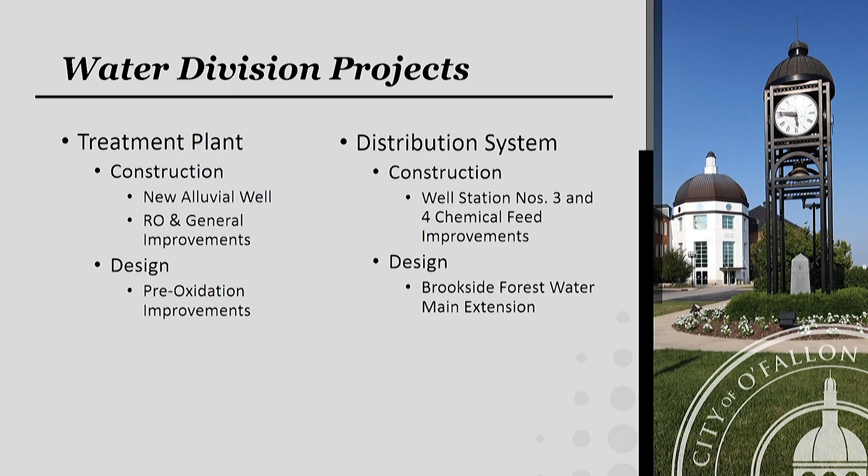So on the distribution side, we just bid out a well station number 3 and 4 chemical feed improvement project that's getting ready to start construction. It goes to council next week for approval. And then in design, we've got a Brookside Forest water main extension. So we'll jump through some of these projects, water side first, and we'll touch on the sewer ones after those.

So here's our new alluvial well project going in right now. This one's, I'll say, about 80 to 90% done. They got the last few months here. They got the electric hooked up to the new well house. They got most of the raw water main in, tying into the existing raw water main that feeds the plant.

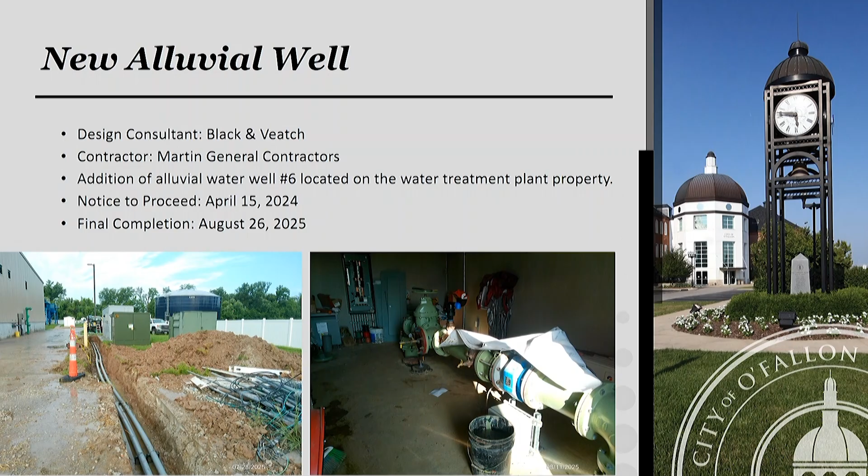And just got some testing to do on that before we can get it up and running and backfilled. Then we did receive some damaged electrical equipment that was shipped loose in a crate that we had to send back. So there's a little bit of a delay on getting replacement parts for some of the electrical drive for the new pump motor. But other than that, it's pretty well just finishing up now. So should start to come together pretty quick here, and then we'll do startup. We're shooting for probably mid-September, I think, right now for it as well.

So kind of unfortunate, it's probably right when the demand starts to drop off for the water into town, but it can't time it sometimes that well. So that's that project. Like I said, it's pretty well close to wrapping up.

This one is just the opposite, and it's just getting started. We issued notice to proceed back in June on this one. The contractor - this will be, other than the public works facility which is around 30 million, I want to say this one's about a $10 million project, so it's probably one of the next largest ones for water sewer. And this one right now is just going through a lot of submittals with the contractor, getting submittals approved, getting the ball rolling on paperwork.

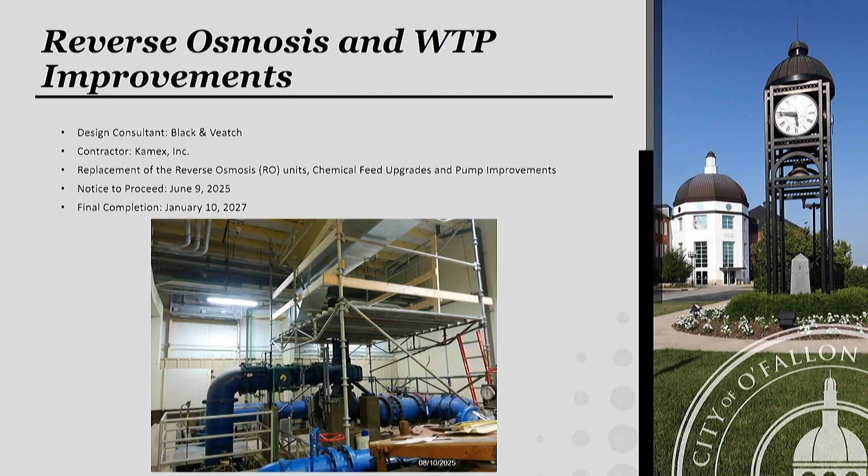One of the other upgrades they'll be starting on next week is replacing the fencing around the site. We've got some old white vinyl fencing that pops out of place when the wind blows a little. It's not a very secure fence for a water plant, so we're installing chain link with barbed wire at the top - a more secure fence. There's also a new electric gate, because the current gate quit on us last week, so we're not spending money to fix it since it's getting replaced with this project. We're using the gate manually right now, but the fencing took a beating during a hailstorm a year or so ago, so it's been patched back together a few times and needs replacing. That's one of the nice things we'll get with this plant project - a nice secure site, since we have operators there overnight by themselves, and we don't want anything to happen.

So the pre-oxidation project is just getting started on design. We worked through scope and fee in a scoping meeting with the consultant Burns & McDonnell. They did a study previously to look at the pre-oxidation system and filter analysis a couple years ago, so this is the next step in that process to get them to go in and do the detailed design of those improvements. We're just getting ready to get them under contract to start that design work, probably in the next week or two.

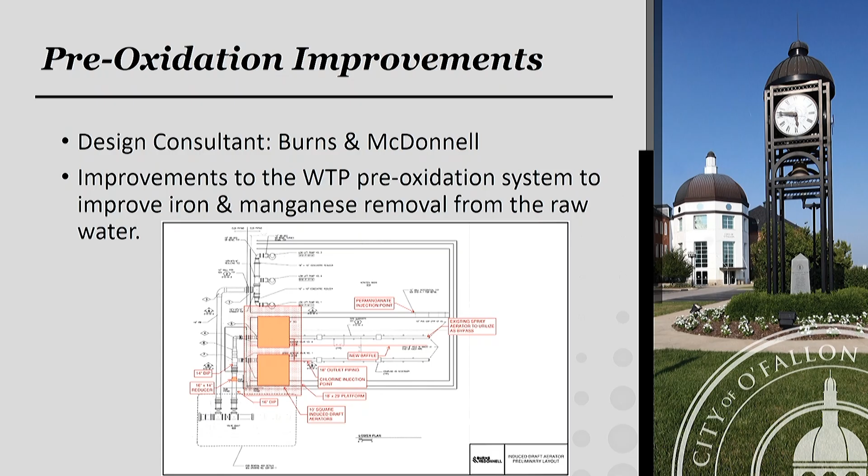This one just bid out and goes to council next week for approval - the well 3 and 4 chemical feed improvements. Well 3 is the water tower on Main Street by McDonald's. Well 4 is the one over by Child's Tire, just off the outer road. Those chemical feed upgrades will convert the disinfection to a chloramine system, so it matches our water plant water and matches any water we buy from District 2 or Missouri American Water. That helps alleviate some taste and odor complaints we get from mixing with our current free chlorine system, so it'll provide a more consistent feed. The other big benefit is it's a safety improvement - we have chlorine gas cylinders at those two sites right now, one right next to McDonald's and one right next to a daycare and a house, both residential. We did have a leak on one of the cylinders from the vendor that we had to call the fire department out for, about a year ago, to contain that leak and get the cylinder off site. It's just not safe having that potential leak hazard out there, so this will get rid of those chlorine gas cylinders as a perk too.

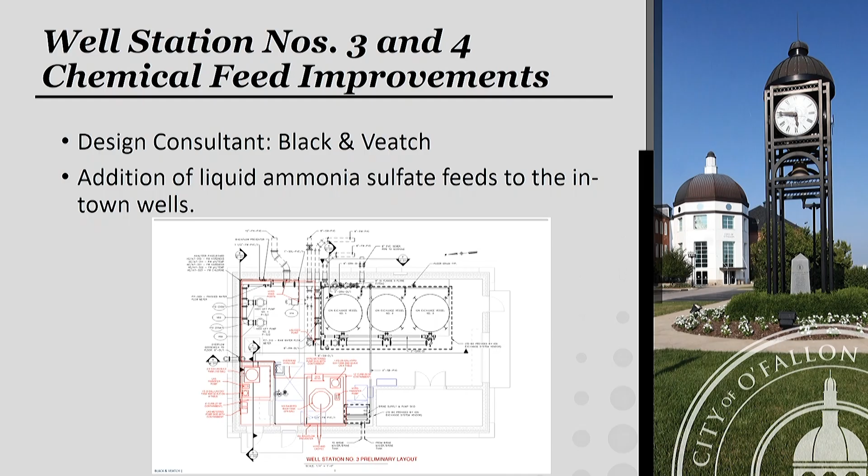On the distribution side, in design, is the Brookside Forest Water Main. We had a meeting last week to look at 3 different alternative alignments - this is just in the early stages of design. This is one of the alternatives they looked at. It will connect Progress West, by the Environmental Services trash receiving station, across Peruque Creek over to Brookside Forest Subdivision, to provide a redundant feed for that area, because right now there's a main just to the north that's the only feed for that area. If we had a fault on that main, it would put a pretty good hurt on that area of town not having a backup supply.

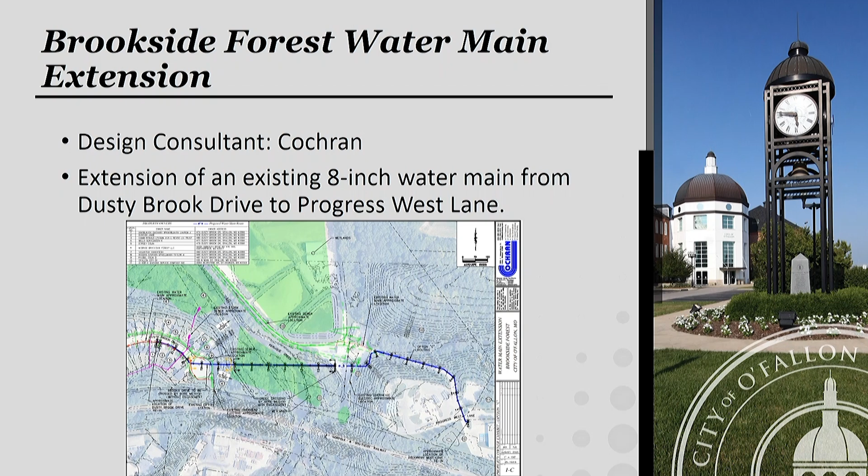Any questions on the water side? Do we want to just go through them all, or I can stop for questions there if you want to at this time? All right, just go through them all. Go through them all and catch up. I got a question slide at the end anyway.

All right, sewer side, we've got a little more activity over there. Two projects in construction right now at the treatment plant.

4 in design. Got 2 in, well, 1 and one's just getting ready to bid out here, so I put it in the construction. Bids should be coming in any day now. So I put it in the construction side since the design is pretty well done, and then the 3 in design on the collection system side.

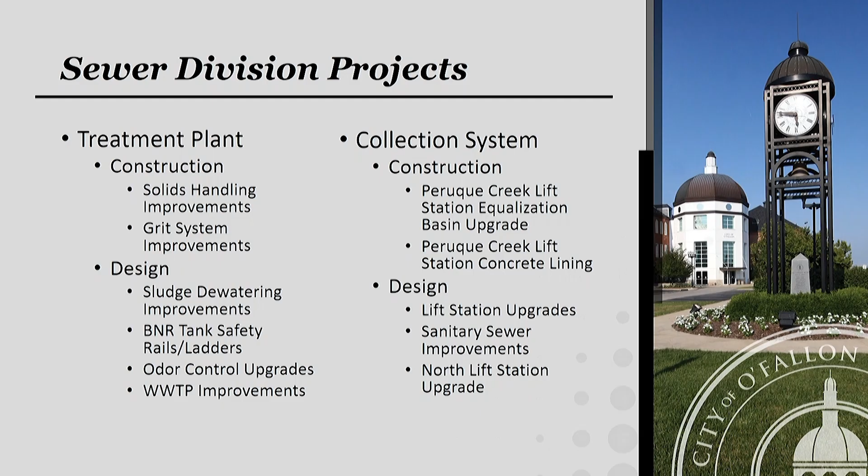First one is the biggest one, I guess, right now going on the sewer side. This is about a $7-8 million project. This is our solids handling improvement project. Mainly, the biggest piece of this is our new headworks building, or they call it the influent screening building. So it's a new fine screen system for the wastewater plant.

So right now we currently have just a 1/4-inch bar screen at the front of the plant. So when our force mains come in, the first treatment the flow sees is that bar screen. This will reroute that flow to this new building. It'll have the same thing, a 1/4-inch bar screen, followed by a perforated plate 3mm fine screen.

So it's just a future protection device basically for all future downstream processes, because we've built this new BNR tank system that's got a bunch of aeration diffusers in there. We've got future plans for the biosolids process to look at centrifuges for that process. So it's kind of one step early in the process to plan for the rest of the treatment as well. But it's moving right along.

It should be done in the next few months here. They got the building pretty well up. There are multiple pieces of this project. They got the main piece of that new screen building done.

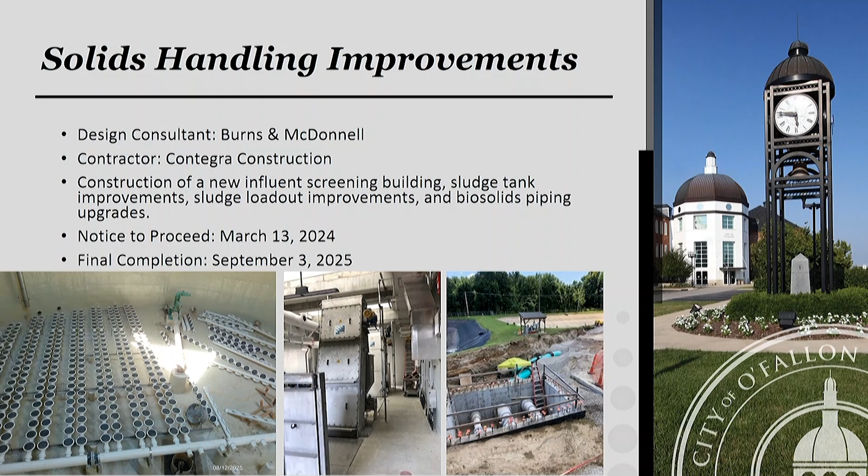Still a lot of activity going on, but it's starting to hit that downhill run, to start finishing things up. So electric's all on, hooked up to the new building. Just starting to prep for the finishing touches. Startup is scheduled for the aeration, I think, early September for the blend tank, and then the screen vendor is scheduling startup around October, early October I want to say. So they are a little behind schedule, but we're working with them on that to get it wrapped up. As long as they keep moving, making good progress.

Grit system improvements, don't have really any good pictures of this yet. This one just got started early June or mid-June, but it's working through the submittal phase right now. Plus there's pretty good lead time on the equipment, so I think that's the main piece, is getting that equipment on order, and then there's not really a whole lot to do until the equipment's there, because we're still using that grit system right now, the current one.

But this will add a new, what they call stack tray style system. You can kind of see on both of these pictures, it's kind of like a stack tray profile there that creates the velocity to settle that grit out, but not settle too much material out to where you're starving your biologics for food later on. And then on the picture on the right, the little thing on the left, that's the grit classifier dewater system.

So we get a new one of those in our grit building. That'll dewater and wash and press the grit and put it in a dumpster for us for hauling off. So it'll be a good project. We can see the current system, just watching the water flow through the process.

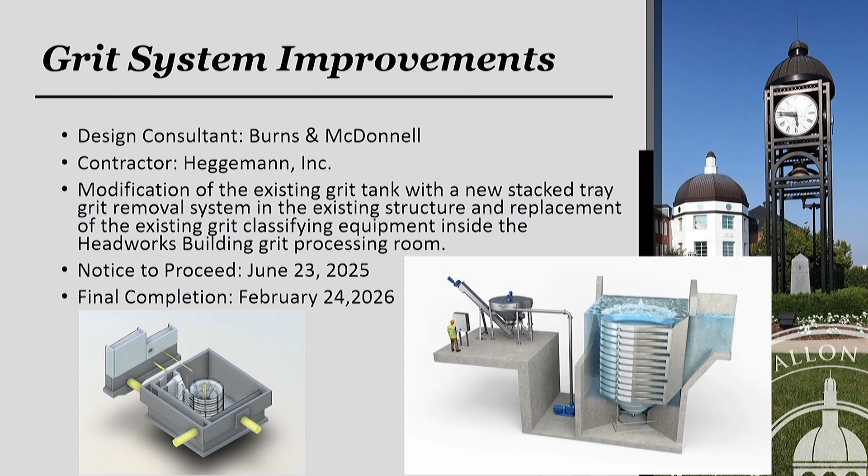You can see there's a lot of carryover grit right now, and it's just not a very efficient process. This will help downstream, like the headworks. It's kind of step 2 in the whole treatment process, and it's going to help all those future improvements coming down the road. Plus, the new BNR system that we built, just maintain that equipment for the life of the plant.

Sludge dewatering improvements. This project's in design right now, just starting final design. We're putting new centrifuges in for dewatering. Before me, I think it was 2018, there was a screw press project that didn't meet performance, so this is kind of the wrap up of that project. This will replace some equipment in there with new centrifuges.

MSD's got a few we looked at. City of Fulton's got one we went and looked at. Jeff City just put new ones in that we looked at. Very efficient process, very contained process. It'll be a good project to clean up that project that wasn't finished before - it didn't meet the performance. But that's again kind of why the first step was the headworks and the grit, to prepare for these centrifuges, so that you're not sending material that's going to damage that equipment long-term and cause issues down the road.

This is called - the picture looks a little grainy - a LiDAR scan of the building, where the consultant came in and did what they call a LiDAR scan. Kind of new technology for surveying, whether it's sewer lines or buildings or whatever. Then they just draw over top of that. This is just a preliminary sketch of some equipment layout that we were looking at.

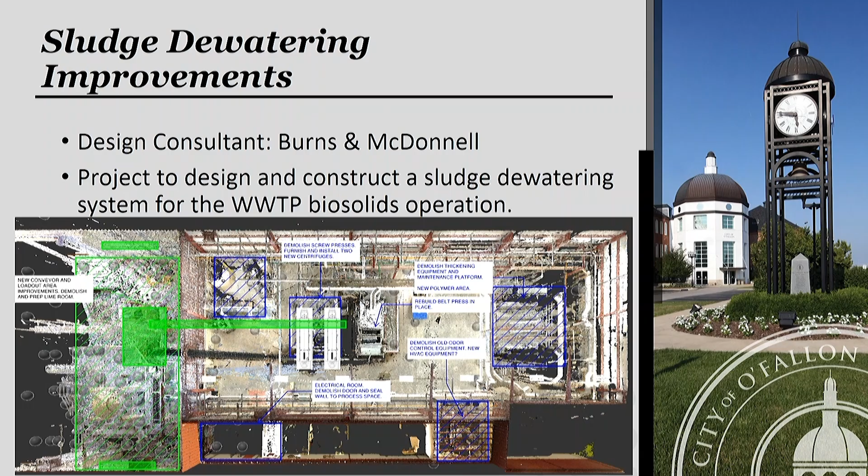Another one we're getting ready to put an RFP out on is this BNR tank safety rails and ladders. Working with Donohue on that to get an RFP put together - we have a lot of aeration diffusers and equipment in that tank that right now the access is pretty poor. You've got to drag a ladder up there, climb over the handrail to get on the ladder to go down into the tank, and it's not very safe. So this is kind of a follow-up to that BNR tank project to make it easy for those guys and safe to get in and out of that tank to maintain that equipment.

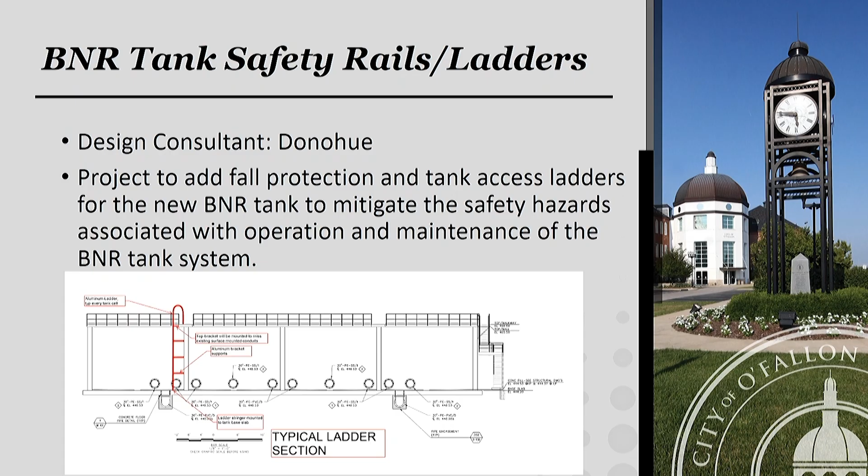So we've talked to some vendors, got some ideas, and now we're at the stage of getting an RFP put together, put out on the street to get it bid out and get that project under the works. That should be going out, I'd say, in the next month or two. They were actually out today to look at some conduit locations, to make sure they avoid them or whatever.

Odor control, another design project in the works right now. We just went through a 60% review meeting with the consultant. This will replace that carbon scrubber that's treating the odors off the current headworks. It's also connected to the new headworks now, and it's treating the odors off the WAS tank, which is that lower domed tank in the picture there.

It's become a highly expensive process to run that carbon, because I've had to replace it about every 2 years. It probably needs to be replaced every year, but we've been replacing it every 2 years since I've been here in 2020. It's ranged from early on like 50,000 a year, up to over 120,000. I think COVID hit and caused that price increase for a while, and supply issues, so it's a very fluctuating cost, and it's expensive.

So we're looking to do what they call a bioscrubber system, or biological treatment system, where you actually grow a biological material on some media that treats the odors, and you don't have to worry about replacing carbon every couple of years or so. That one, again, is just about 60% design. I think they're getting close.

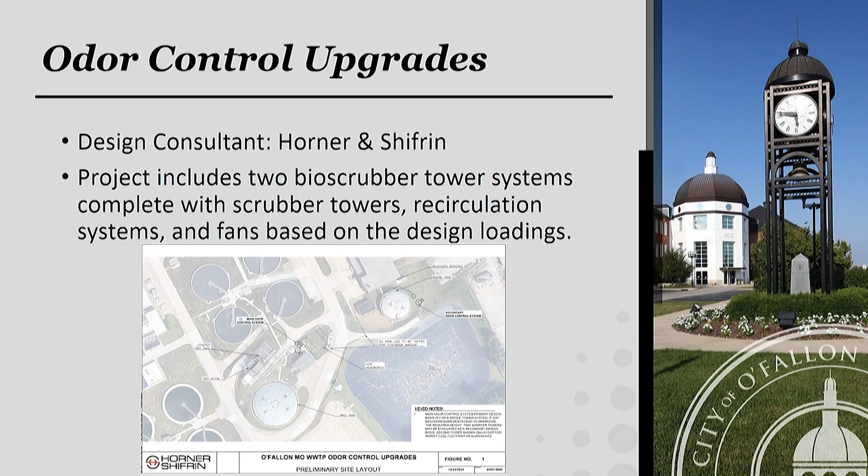We've got a phased project here for our wastewater plant improvements, looking at our clarifiers. In the past, we've rebuilt them every couple of years, doing preventive maintenance and rebuilding drives, but that's been done multiple times already. So this will actually go in and replace a lot of this equipment with newer style equipment. The plan is to do one every two years, so we don't have to spend multi-million dollars on day one and have them all the same age. This way we can phase them in so they're not all at end of life in 20 years from now and need to be replaced all at once.

This is a good phase project. Primary clarifier number 4 is the first one we're going to hit. They went in and did a structural assessment of the tank, and then we got a plan together.

We went and actually looked at Duckett Creek's newer setup, since the scum removal system on our current clarifiers isn't very efficient. Duckett Creek's got a dual dipping scum system that will help us remove scum off of our clarifiers. Ours isn't terrible, but theirs is a lot better and newer, with fewer wear parts that we'd otherwise have to constantly replace. This would be a much newer style system and better overall.

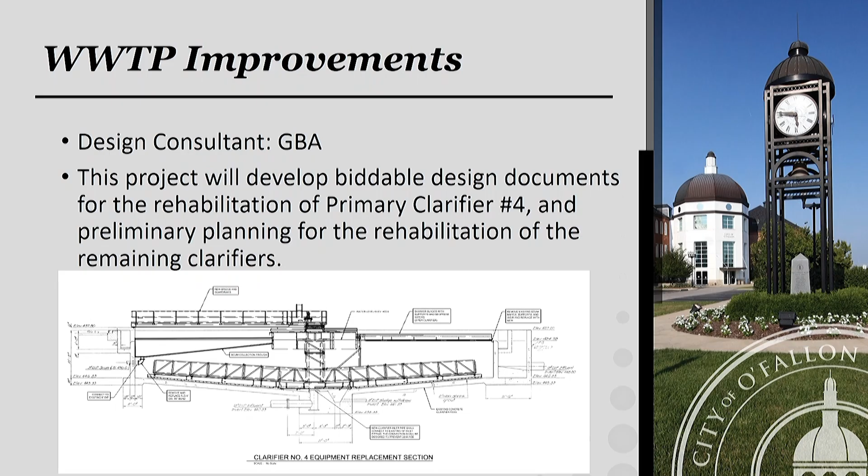The Peru Creek lift station basin upgrade has been drawn out a little bit, but we're getting close now. We've got a change order put together with the contractor, since we had to add a few things for DNR, like a head wall at the pipe where it goes into the lagoon. Some minor details there, but we got that cleaned up in the scope of the contract with a recent change order.

We've also added the rest of the asphalt paving. They were already paving part of this roadway, so we're going to pave most of the roadway around that lagoon for truck access. Street Services uses it for salt storage down there, and they've paved part of it by their salt dome, where they're putting in a new concrete truck system with silos. This will make for very good access, especially during winter.

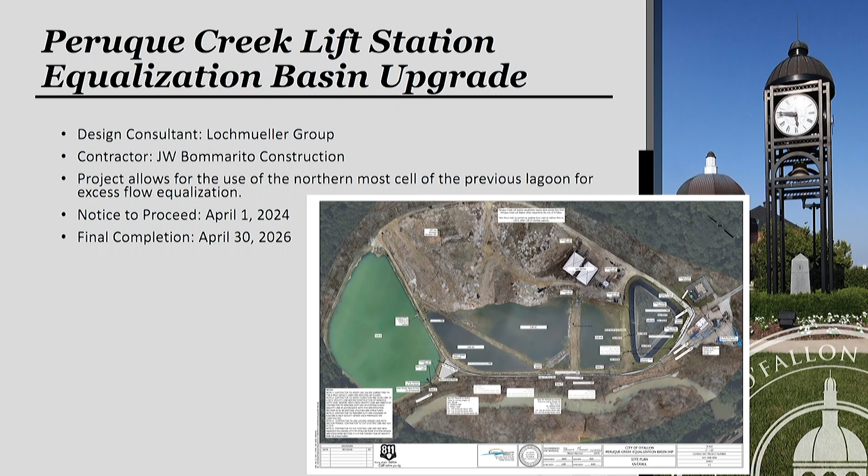We just cleaned up that scope recently. The contractor has a diesel powered pump that's part of this that they have to order, which is a lead time issue we're working with them on. They're waiting on that to show up — I can't remember the exact lead time, but it was weeks. Once they get it in, they're still shooting to get the paving done before the asphalt plants close this year, but if they don't finish, we gave them a little extra time to do the paving next spring. They're shooting to get it done before the plants close though.

Another project down there at the Peruque Creek lift station that's out on the street right now is the wet well lining of that lift station. We did West Lift Station, one of our other main lift stations, a few years ago. This is the Peruque lift station at the lagoon site, and the lining will protect the concrete long term, since it's a corrosive environment with a lot of odor and hydrogen sulfide in the air that takes its toll on the concrete. This just helps prolong the life of the lift station.

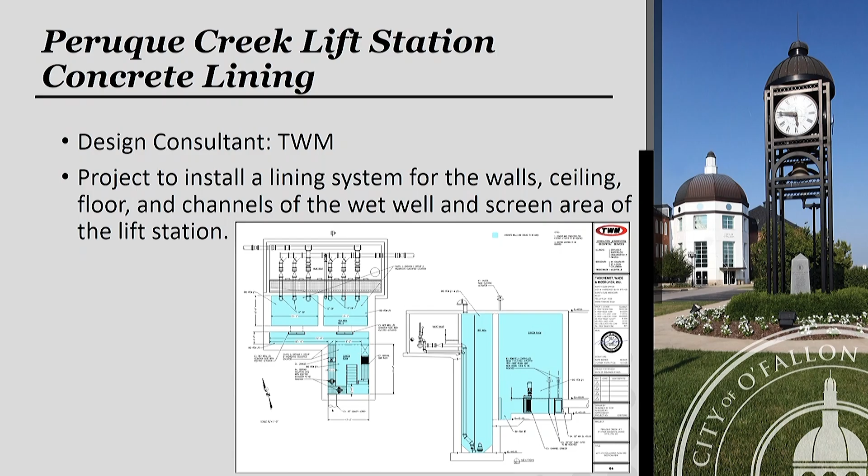Then a couple of smaller ones. This is the lift station upgrades project we started last year — some improvements we know we need at a couple of different stations. The East lift station is mainly the first one. We've got some sluice gates for the bypass channel that are stuck and need to be replaced, so they're putting together a design to get those replaced, as well as doing an assessment of a stairwell system that goes down into the wet well, which is getting corroded from the hydrogen sulfide gas.

So we just want to do a structural assessment of that, make sure there's no damage or issues to that stairwell, so we know we've got a safe structure.

And kind of the same thing at the Peruque lift station. There were some actuators down inside the lift station that weren't working, so we actually want to move the controls, the motors, up to the top out of that environment, and then do a structural assessment of that stairwell and interior as well.

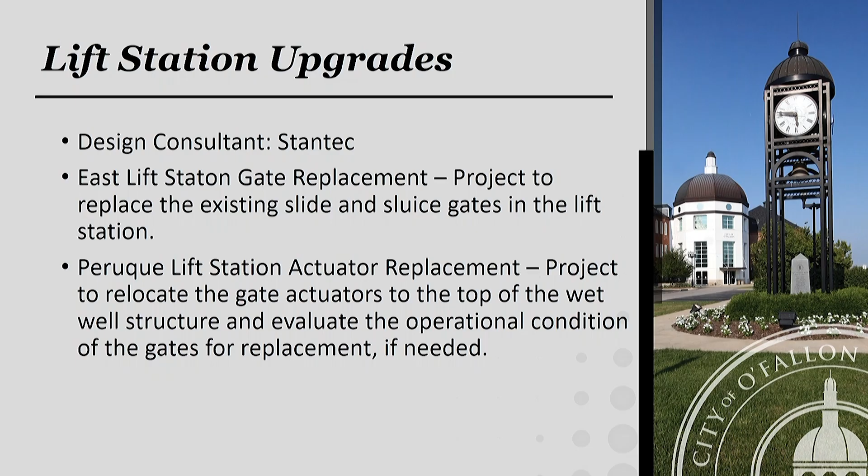And then a couple sewer improvement projects, there's 3 of them basically. Country Life Relief Sewer - this one's in design. They got geotech done here a few months ago, I think. So they should be getting close to wrapping their design up and getting these out on the street in the next month or so, I'd say. But it's Country Life Relief Sewer.

Steve knows more about these, so if you have any questions I'll defer to him. But then Barrington Relief Sewer, and then the Kellerman flow meter study was part of this - flow meter down there by the Peruque lift station.

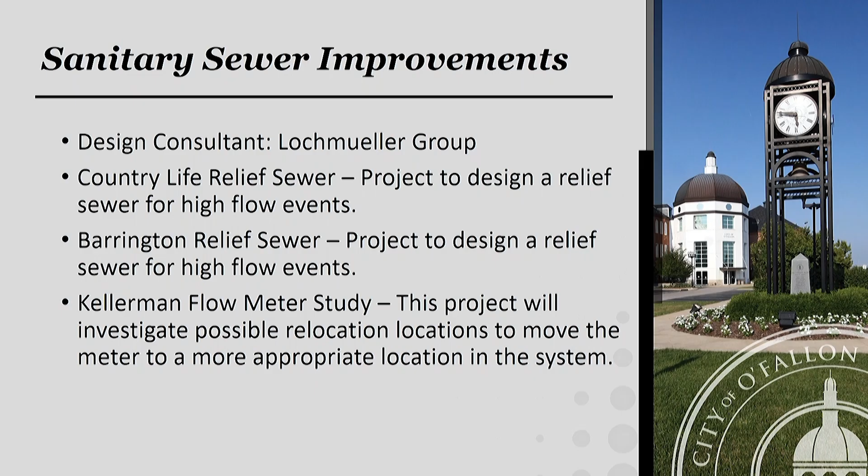That picks up a really small flow as part of the Public Water Supply District 2 billings, from the flow they send us. I feel like flow meters were just kind of added over time to make things work, but this is a study to look at that system and see if we can simplify it - whether we remove that flow meter and reroute that little bit of flow that's coming in through it straight to the lift station, and see if there's a better way to do that and basically eliminate the flow meter, because that flow meter did have issues last year that we had to repair. So again, just trying to look at it from a high level and see if there's a better way to do that District 2 calculation and billing without it, or if there's a better spot for it.

And then the North Lift Station upgrade - this is really early in design too. We're working with GBA on the scope on that still. But that lift station, this is the one actually inside the wastewater plant on the south end of the plant, but we call it the North Lift Station because it's the north end of town. It feeds one of the lift stations that feeds the wastewater plant.

It was built originally with the original plant from 1970, and it's just got valve issues, pump issues. So we're just looking to either rebuild it or replace it. We're going to do an assessment of that station, see what it needs, and then go from there.

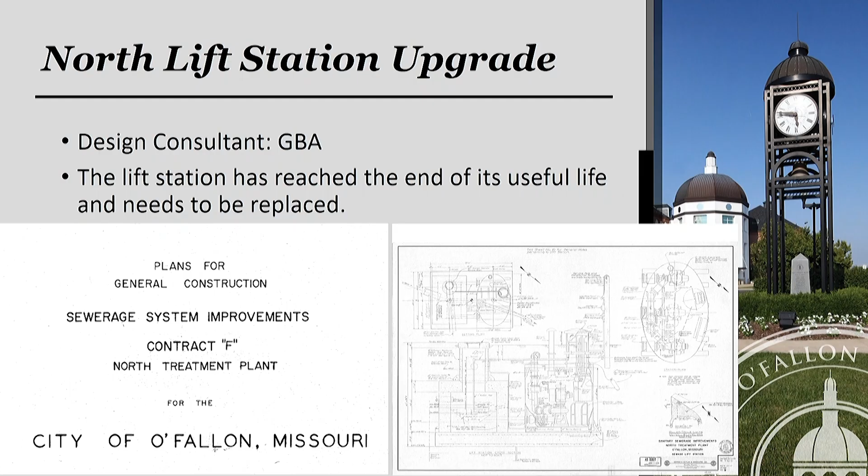But the other thing that's kind of driving this as well is that new police facility will be sending its flow to the station. So we just want to make sure we have a reliable station to be able to transfer that flow to the plant. So, and I think that was it.

Yep. All right, fire away - who's got questions?

Okay, well I'm thinking back on the water - a few years ago we had discussions of a new water tower.

Yeah, that's still in the works. I don't have it on here. It got kind of put on hold for developer issues - the developer sold the development or changed hands. I don't know, and it got put on the back burner because that developer was just going to sit on it. I'll let Steve talk because he knows more about the history of that.

But so a new developer did pick up the project, and we did get the land for the water tower. But the major problem right now is funding for it. So when we first proposed that, it was before all the inflation and construction costs hit. There was a period there a few years back that within a year or two, construction prices went up 40%, and that really put a hurt on our CIP.

And then we also had an engineer that had done the study on that, did the initial estimate on that - he grossly underestimated the cost of the project by about another 15-20%. So by the time all that happened and we got the real costs that we're planning for, there wasn't enough money in the budget for it. So it's out a few years as far as trying to get it funded, but it is a priority - we just don't have the funds right now.